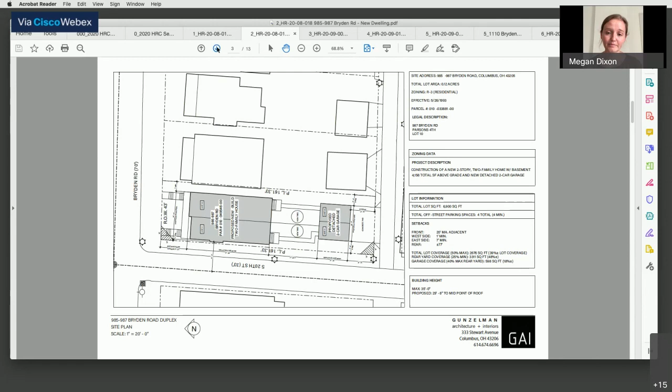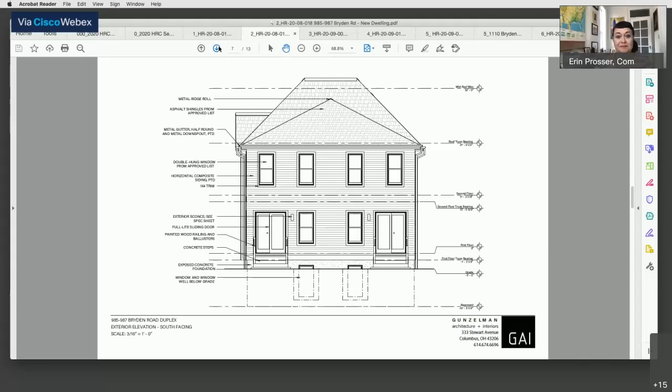Commissioners, questions on it? I have no concerns; the applicant has addressed everything that I can recall being raised, and I'd be in favor of making a motion for approval. I agree with Joe. I'm also in agreement. Why don't you go ahead and make the motion?

In the case of HR-20-08-018, 985-987 Bryden Road, motion to approve as presented and revised by the applicant for presentation this evening. For clarification, that was Joseph McCabe making that motion. Is there a second? Second, that's Jackie. So we have a motion made and a second. Any other discussion on it? If not, we're going to go ahead and vote. Erin, yes. Jackie, Joseph, yes. I'd also vote yes, so the motion carries.

Congratulations. This is going to be a great project. Thank you so much for coming in, and best of luck to you.

Thank you. The next item on the agenda is application number 3, which is at 1662 and 1664 Bryden Road. Would you take us through that? Okay.

Request for action, a variance recommendation. It's a 2 and a half story brick double, one up and one down, located on the north side of Bryden Road. The neighborhood is characterized by 1 and 2 family dwellings dating from the late 19th to early 20th century. The request is to allow 3 dwelling units in the existing 2-family dwelling, to retain the existing gravel parking, and to reduce the required parking from 6 to 3 spaces, to legitimize the existing lot width, and to legitimize the existing side yard on the west elevation.

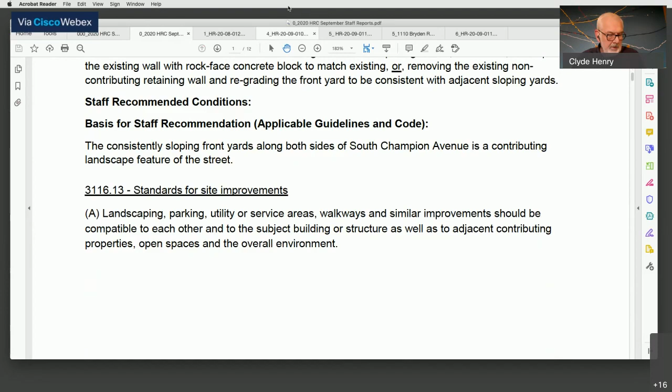Thank you. Is there anything else you want to add to the presentation? Just to add that the wall itself is pretty much falling apart and in a pretty bad state of repair. And if approved, replacing that wall would be the preferred option for me. Okay, thank you. Thank you.

Well, I'll start. This is Jackie, and I'll say that we have seen a lot of retaining walls in my short time on the commission compared to some of you who've been on many years. And I think we have a very consistent treatment, which is that in these neighborhoods like Old Oaks or Bryden Road, where the sloping lawns go down to the sidewalk, that's an important characteristic of the historic neighborhood. We generally do not approve replacing the retaining walls.

We generally approve either some repairs, or if an applicant wants to remove a wall, we allow them to do that and then make the yard go back to what it would have been when the house was built, which would have been a sloping yard to the sidewalk. So I don't see a case for building a new wall with more modern materials.

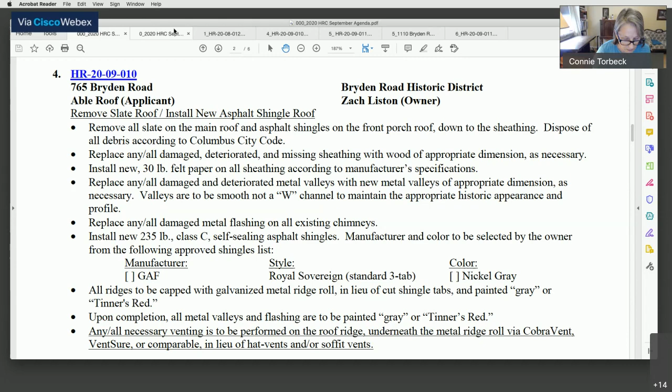This is 765 Bryden Road, and it is a roof application. This is a brick single-family dwelling located on the south side of Bryden Road. The application is for removal of a deteriorated slate roof and installation of a new asphalt roof. This is a complex roof with slate that appears to be more narrow than the general 11 to 12 inches wide.

The commission noted at the September 3rd business meeting that the slate does appear to be beyond its useful life, but the replacement shingle should match the dimensions more closely than a standard 3-tab. Also, the cresting at the edges of the gable ridges and the caps on the conical roofs would need to be reused or replicated. The applicant has modified the original application from a standard 3-tab shingle to the GAF slate line shingle, which appears more closely matched to the shape and dimensions of the existing slate, and is also here to discuss the cresting. Recommend removal of the deteriorated slate and installation of GAF slate line shingles, and that the cresting at the edges of the gable ridges and caps on the conical roofs be reused or replicated.

And Dan Bible is here for this application from Able Roof. Okay, thank you.

Dan, do you swear to tell the truth in your testimony before the commission this evening? If so, say 'I do,' and state your name and your association with the project. Make sure your camera's on. I do, I don't know if you guys can see me. I turned it on. Yes. Do you? And we hear you good. Yes. So, Dan Bible, production manager with Able Roof.

So regarding those—so you guys did get the GAF Slateline shingle change, correct? Is that what you guys did get? Yes. Okay, okay. So regarding the cresting, based on what I'm seeing and my knowledge of that, it looks like it's attached like a standard cupola, so it should be easily removed, and it could be reinstalled as well. The only concern I may have is that depending on how it is removed, it may be damaged. We can reuse them, and ideally they'll be in good shape, but unfortunately we are unable to replicate them.

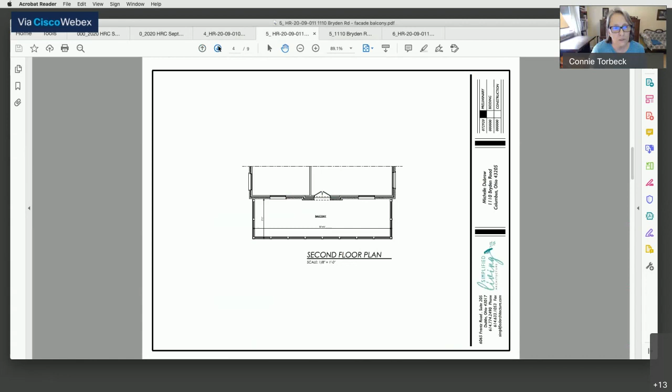But I have three real big concerns about that. One being that if it were approved and built, it would have to be really exacting dimensions. I think all of the balusters would have to be custom milled—it couldn't be skimpy 1.5 inch balusters or anything like that. Another concern is that code would not allow it to be the height that a railing on a roof was historically, so I think it might end up looking kind of odd.

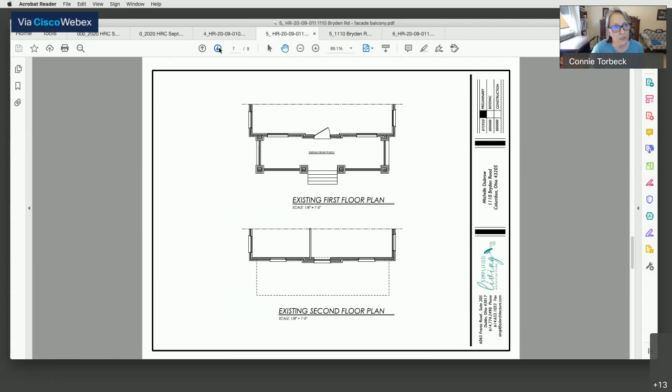Okay, thank you. Do we have representatives from the applicant with us this evening? Yes, that's correct.

Do you swear to tell the truth in your testimony before the commission this evening? If so, say 'I do,' and identify your name and your association with the project. I do. My name's Karen McCoy, and I'm with Simplified Living. I do. Michelle Dubrell, I'm the applicant owner.

Let me look here on screen. I do. My name's Tim Flynn, I'm the general contractor that's going to be helping her with this work. Okay, contractor.

Do any of you want to add anything to the presentation? Just that Michelle had provided earlier a statement of hardship that had to do with safety for having the balcony above. We also provided some other examples of homes that had items added to their front facade that weren't historically original to the home.

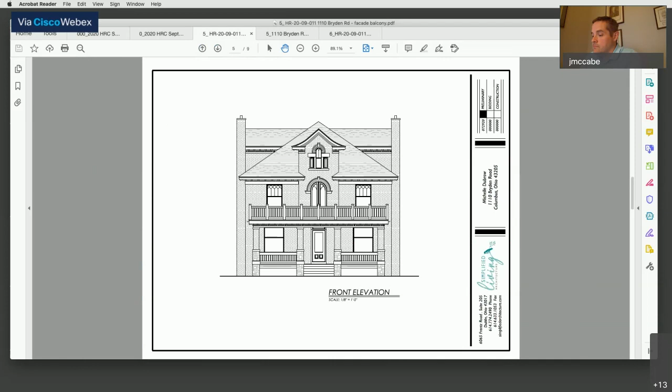Okay, any other questions or comments from the commissioners? Okay, would somebody like to put this into a motion? Motions are generally put in the affirmative.

This is Stuart Givney, Commissioner. I am moving that application HR 20-09-011, 1110 Bryden Road, be voted upon as submitted. Okay, thank you. Is there a second? Second. Okay, Joseph McCabe. Is there any further discussion? If not, we'll vote. Let's start.

No. No, okay, votes no. Jackie? No. No. Stuart, how do you vote? No. Also votes no. The motion does not pass, so it looks like it will remain as it is.

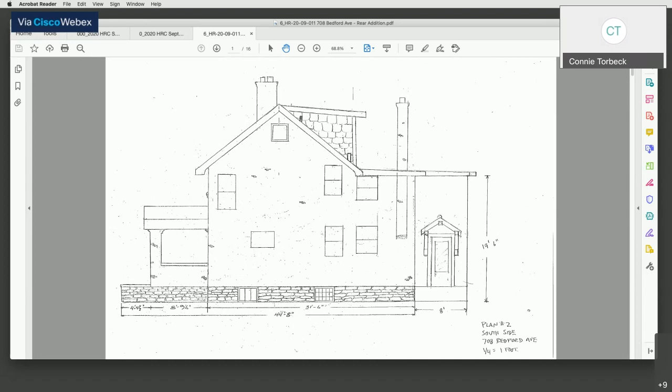Okay, and if we see him, or if you see him turn his camera on, let us know and we'll swear him in.

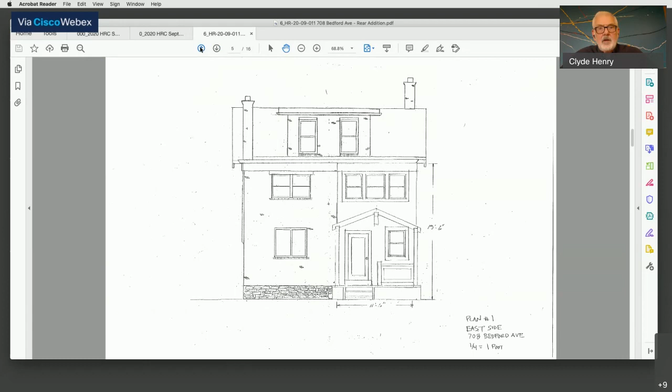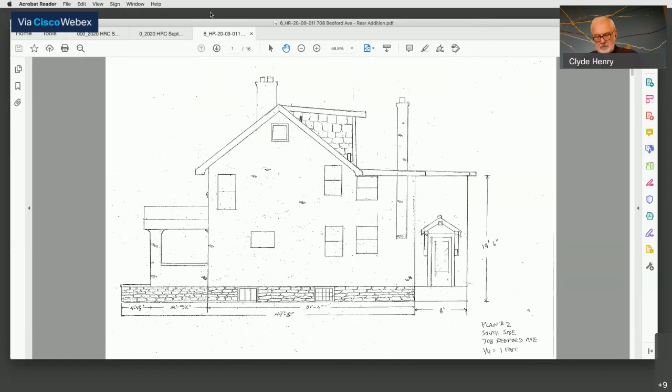Erin, any comments for us to review? It sounds like, to me - sorry, I can't open the file for some reason, it's not letting me do it on the box - but there's two separate proposals. One is to maintain the existing back addition, essentially what was the second floor porch. And then there's a second option where he's bumping it out a little bit. Is that correct? That's correct.

I'm comfortable with the first one, and it is the rear of the house. The drawings don't give me a lot to go on the deeper addition. It is the rear of the property, and I don't know that I'm fundamentally opposed. The drawing that's up right now where it's just kind of the big box stuck on the back gives me a little bit of - I just don't know entirely what I'm looking at, and I think we need more details to understand what that expansion of the house would look like on the backside. But the first iteration, to solidify the second floor porch as a part of the house and then add a little porch on the back, I don't think I have a lot of concerns with.

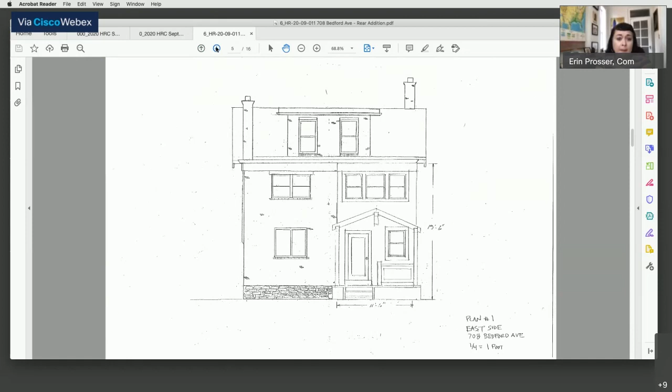Jackie, I don't really have anything to add to the conceptual review here. I think that when the details come back, there may be more discussion, but the state of things on the back of the building, the condition is poor, and I think the general conversation has covered anything that I would have had to say.

Hey Steward, you want to add anything? Well, this is an interesting situation because if we look at the exterior building alterations code, we don't want to diminish the characteristics that are distinguishing for the house. However, if the necessity of an addition is to provide a more suitable living opportunity for the house itself, then I think we need to maybe take a look at that piece of the discovery being provided to us with a little more definition, as was mentioned earlier. I am okay with keeping the porch as it is in like kind, but I wouldn't be opposed to the addition per se, but at this point I need more information.

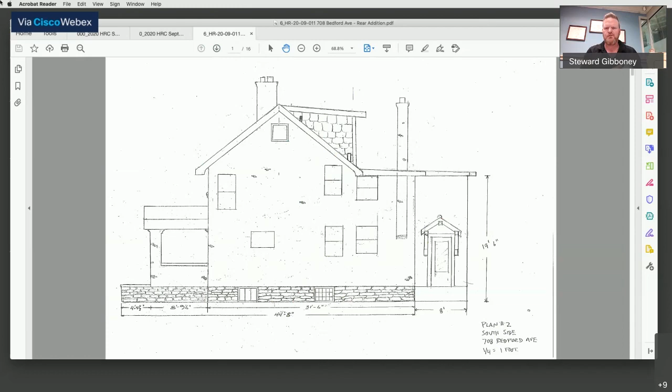Any other comments? I guess that concludes the conceptual review. I think the consensus is replacing the footprint would certainly not be opposed. If the addition is justified, there's not a strong opposition to it if it's done correctly. Does that kind of sum up what everybody's saying, or anybody want to add to or take away from what I've said?

Okay, then I think we have concluded our applications. Is there any new business? I don't believe so. So I guess the only item left on the agenda is a motion to adjourn.